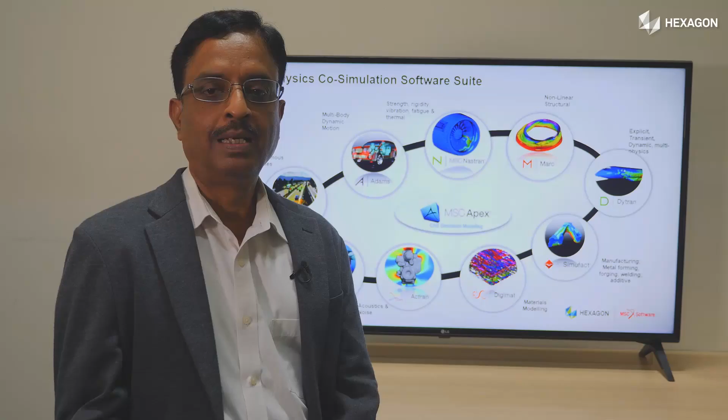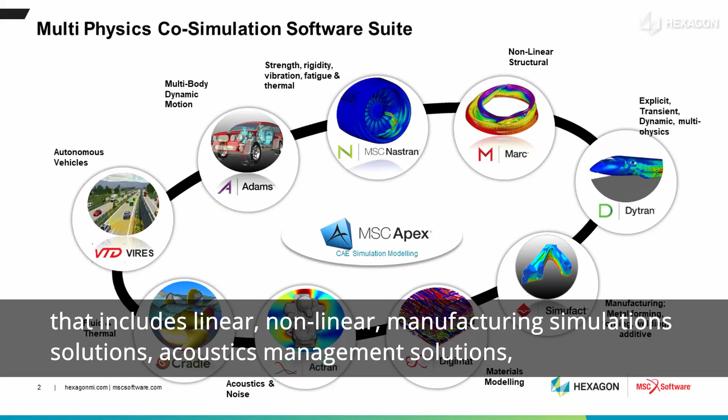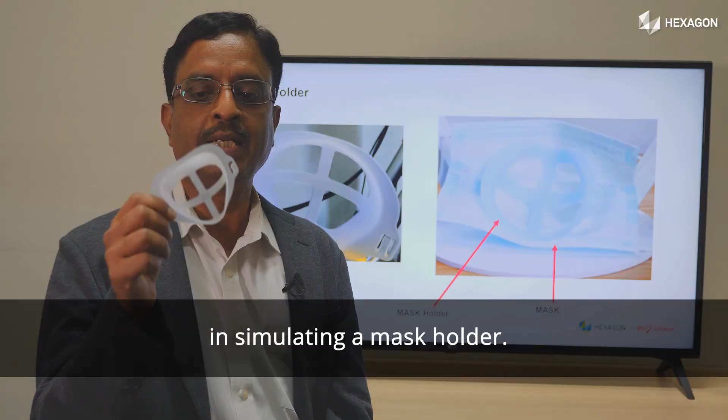Hexagon MSC Software has a wide range of multi-physics co-simulation software that includes linear, non-linear, manufacturing simulation solutions, acoustics management solutions, CFD simulation solutions, multi-body dynamic solutions, and many other solutions, and all of them work together to solve a single engineering simulation problem. I'm going to explain how Hexagon MSC Software is going to help in simulating the mask holder. We are going to do three different simulation applications for the mask holder.

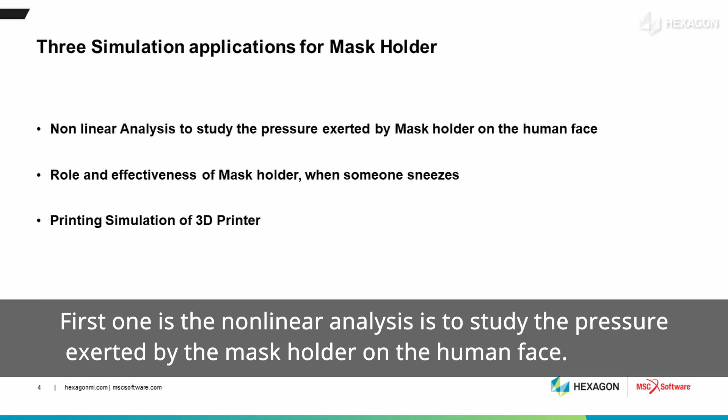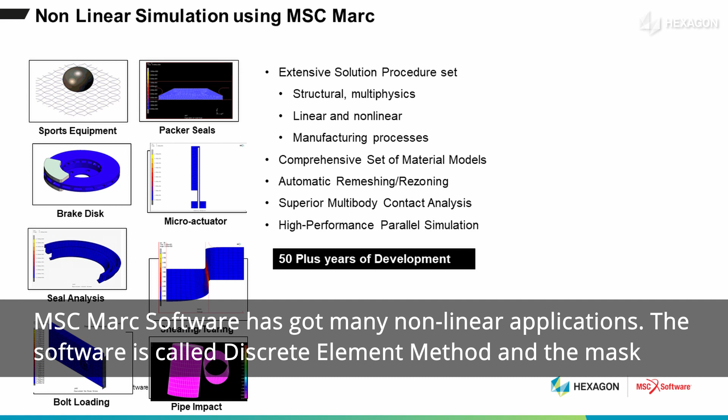The first one is a non-linear analysis to study the pressure exerted by the mask holder onto the human face. The MSC Marc software has many non-linear applications. This software is called the discrete element method, and the mask is modeled as a fabric structure.

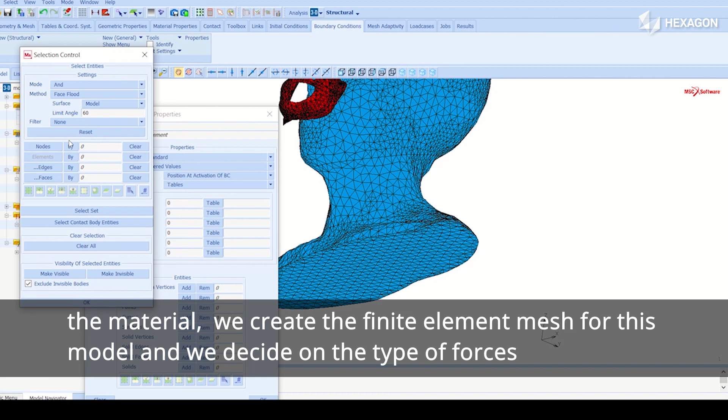We bring in the CAD model, we bring in a dummy, and we put this mask holder onto the human face. Then we define the material, and we create the finite element mesh for this model. We decide on the type of forces that go into the mask holder, and we provide the supporting conditions.

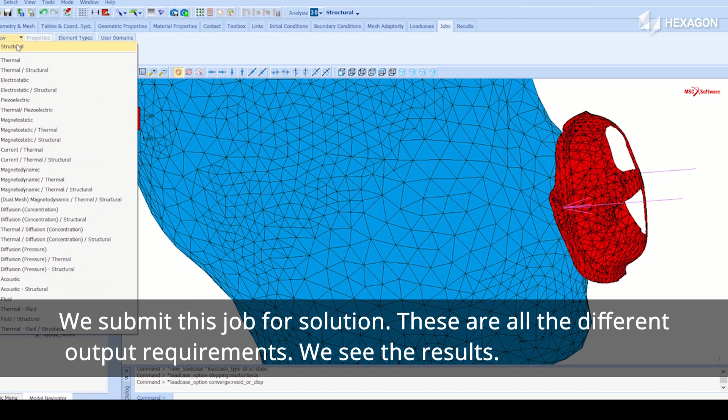Then we submit this job for a solution. These are all the different output requirements we select, and then we see the results. You can see the way the mask holder moves up when somebody is using it, and also the pressure distribution on the human face.

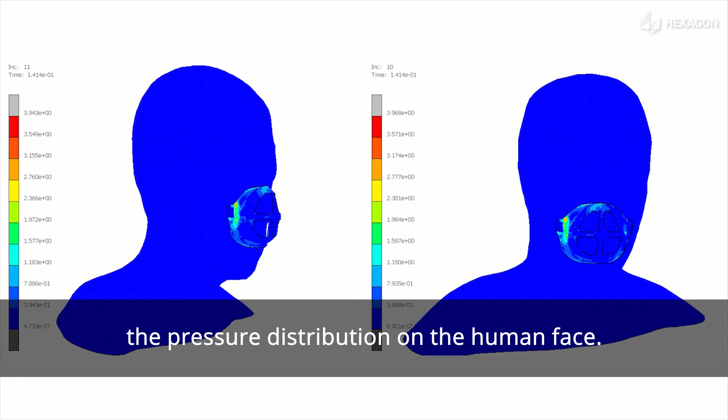The second one is that the mask holder is also going to change the characteristics of the way you breathe and also the way you sneeze along with the mask.

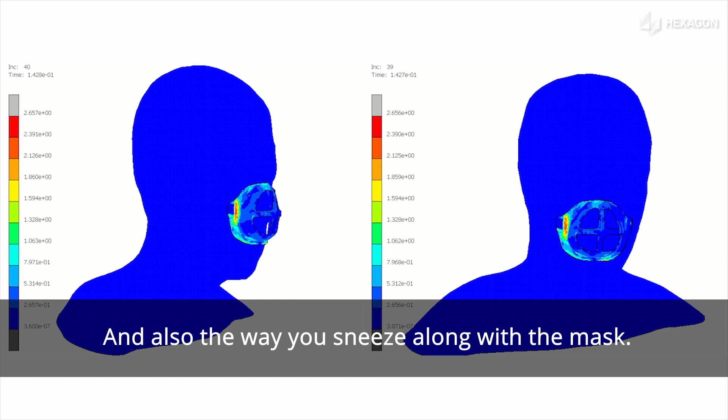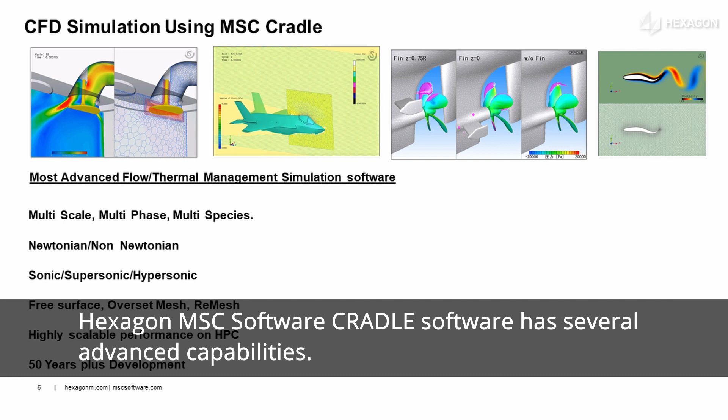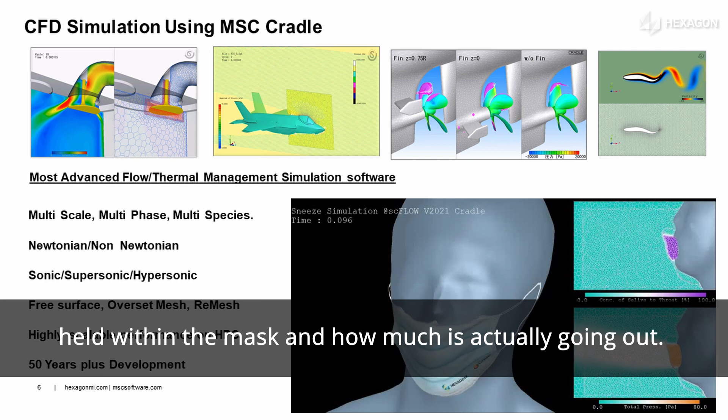Hexagon MSC Software has MSC Cradle, which has so many advanced capabilities. This is a model using CFD software. In this situation, when somebody is sneezing, we look at what kind of particles are being held within the mask and how much is actually going out.

One simulation is with a mask, but now what we are going to do is put the mask holder onto the mask, and somebody is going to sneeze, to see what really is going to happen. There are multiple things this CFD solution can do.

Now you see in this result there are two conditions. The left one shows without a mask holder and the right one shows with the mask holder, and also how the airflow pattern changes, and whether this will also create any issue for those people who hold the mask and are also able to breathe.

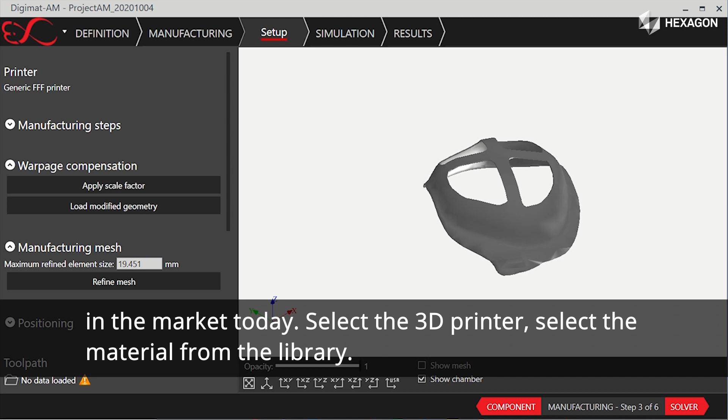Hexagon MSC Software has a solution called Digimat AM. This has a comprehensive library of all the 3D printers in the market today. You select the 3D printer, you define the material which comes from a library of materials. In this case, we define it as a nylon material. Then we simulate how this is going to be building up while the 3D printing happens.

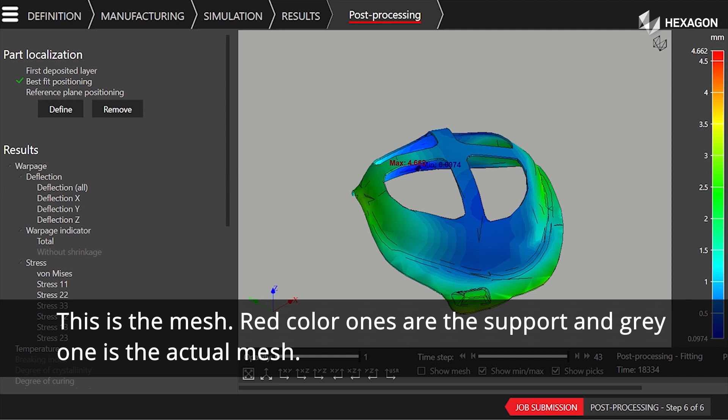After that, we study the mesh - the red color one was the support and the gray one is the actual mesh. Then we see the results as the 3D printing happens, how much distortion and deformation occurs.

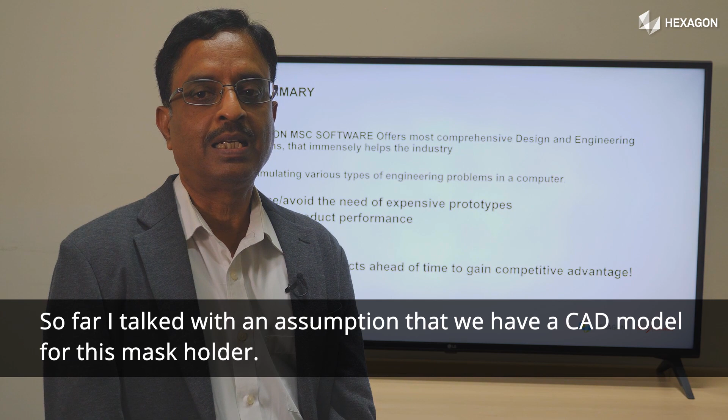So far I talked with an assumption that we have a CAD model for this mask holder. But in case there is no CAD model available, this can be reverse engineered.

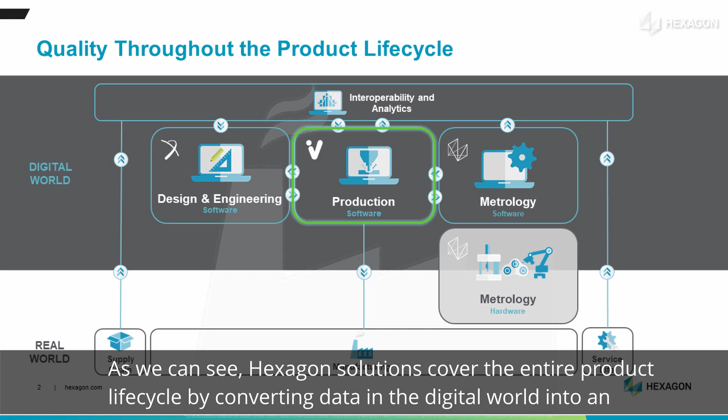Now we will go through the details related to the smart concept to reality functionality with Hexagon Solutions. As we can see, Hexagon Solutions cover the entire product life cycle by converting data in the digital world into an actionable, meaningful output to be implemented in the real world.

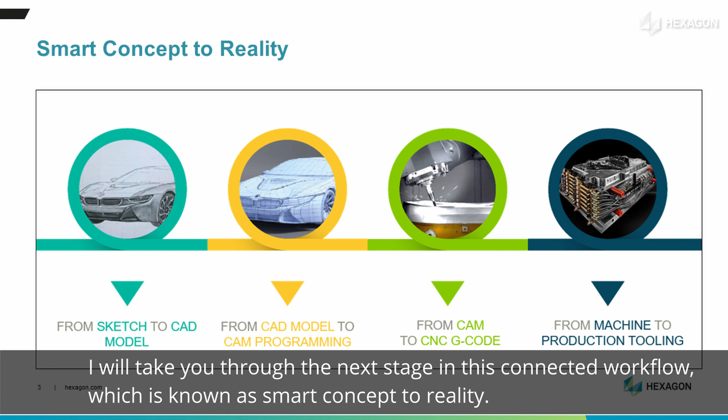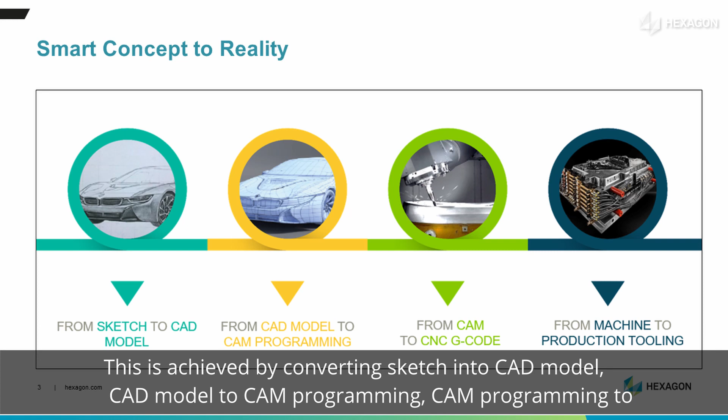I will take you through the next stage in this connected workflow, known as smart concept to reality. This is achieved by converting a sketch into a CAD model, to CAM programming, to CNC G-code validation and simulation, and from machine to production tooling.

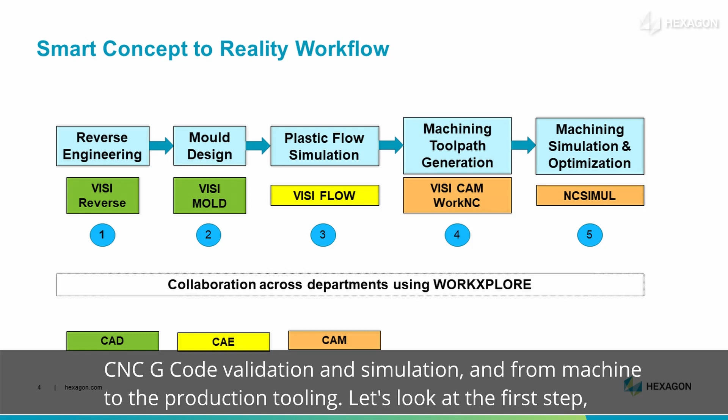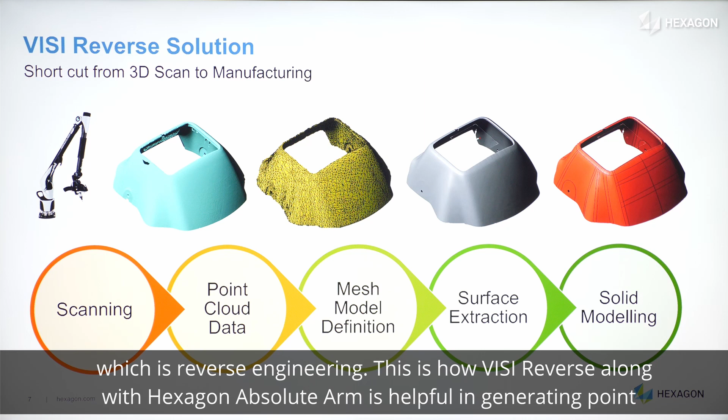Let's look at the first step, which is reverse engineering. This is how VISI Reverse, along with Hexagon Absolute Arm, is helpful in generating point cloud data by scanning the physical part and converting it into a mesh model, from which the surface is extracted using various methods, finally creating a 3D solid CAD geometry.

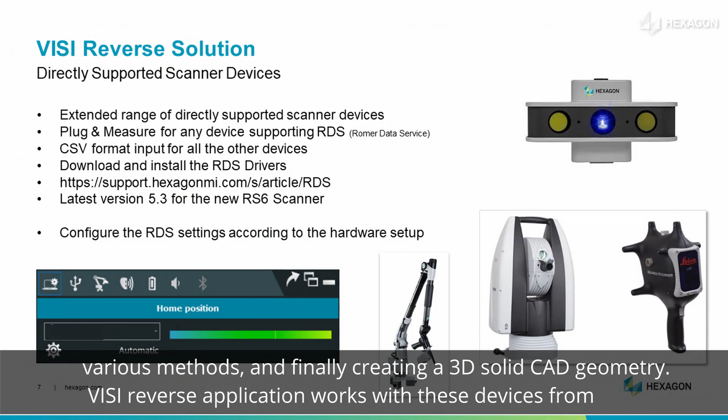VISI Reverse application works with these devices from Hexagon, namely the Portable Absolute Arm, the Leica Absolute Tracker, as well as the AICON Scanner.

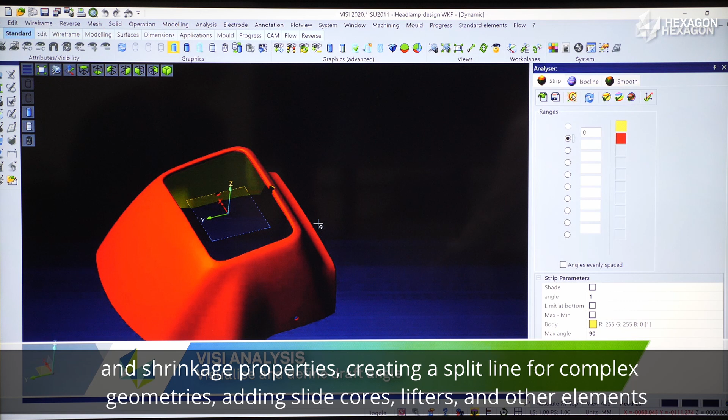The next step is to generate the mold design and simulate the plastic flow. This is achieved very quickly and easily in Visi. The process involves draft angle visualization, face drafting, assigning specific material and shrinkage properties, creating the split line for complex geometries, adding slide cores, lifters, and other elements from a standard catalog, defining the runner gates and cooling channels, and finally checking for manufacturing defects like weld lines, warpage, and air traps before the injection molding process with the help of VisiFlow.

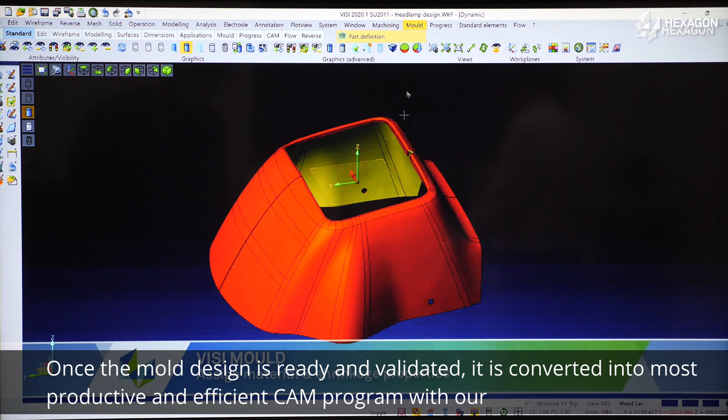Once the mold design is ready and validated, it is converted into the most productive and efficient CAM program with our flagship solution VisiCAM. VisiCAM is an extremely popular CAM solution in plastic mold manufacturing companies, with its latest features ensuring hassle-free programming and productivity through unparalleled machining strategies for various industry segments.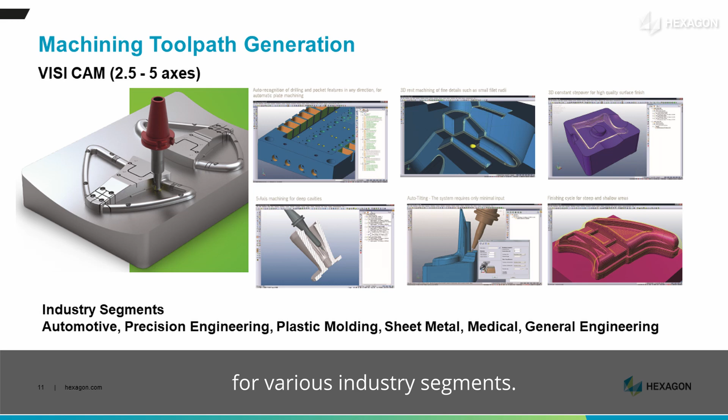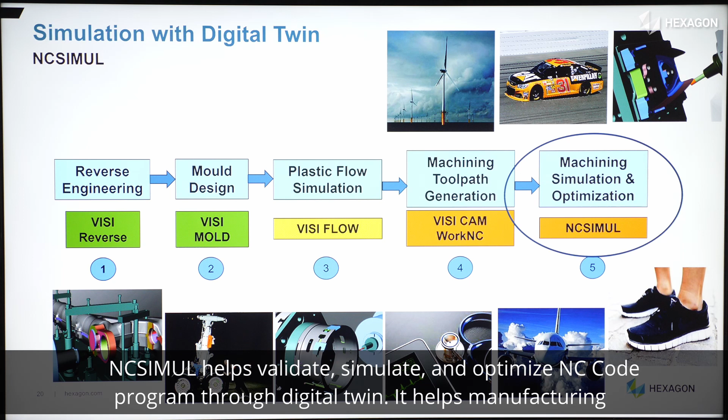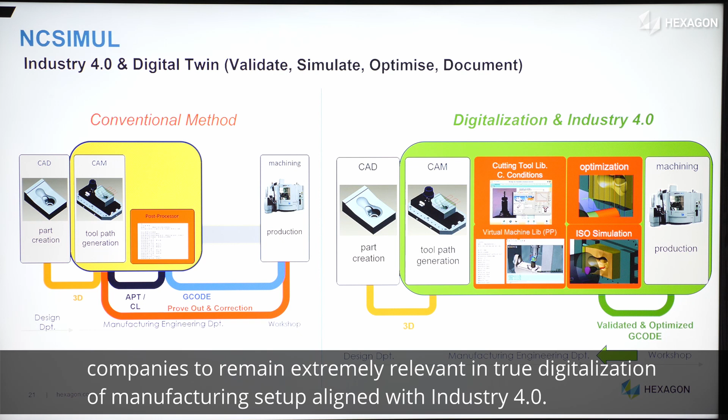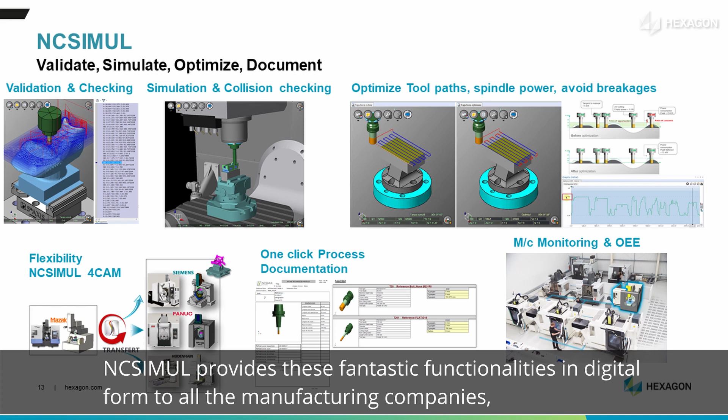A stitch in time saves nine — that's exactly what NCSIMUL provides to manufacturing companies. NCSIMUL helps validate, simulate, and optimize the NC code program through a digital twin. It helps manufacturing companies remain extremely relevant in true digitalization of the manufacturing setup, aligned with Industry 4.0. NCSIMUL provides these fantastic functionalities in digital form to all manufacturing companies, thereby avoiding every possible risk in the real world of machining.

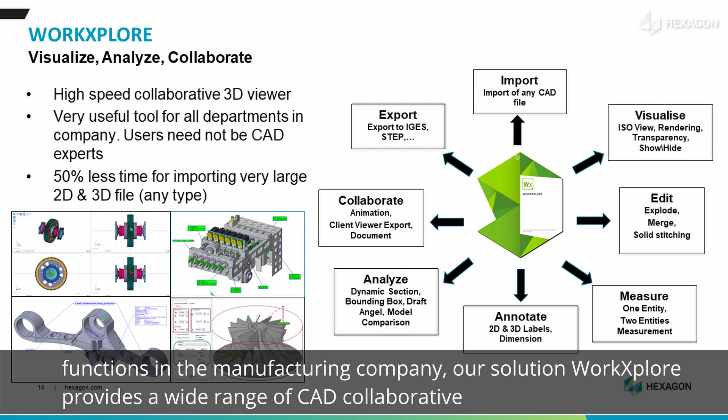In order to ensure collaboration amongst various functions in the manufacturing company, our solution WorkXplore provides a wide range of CAD collaborative functionalities, as can be seen in this slide.

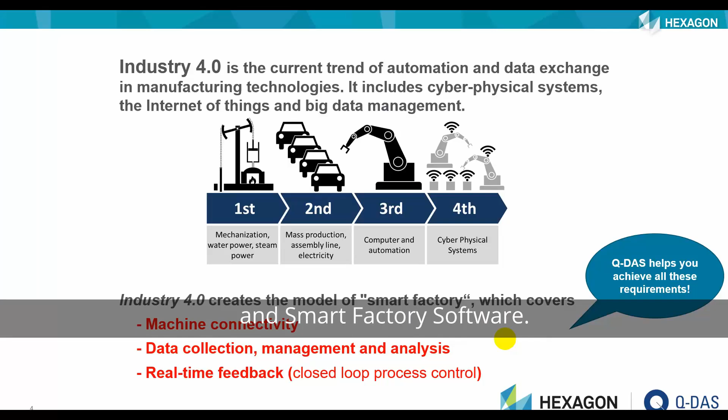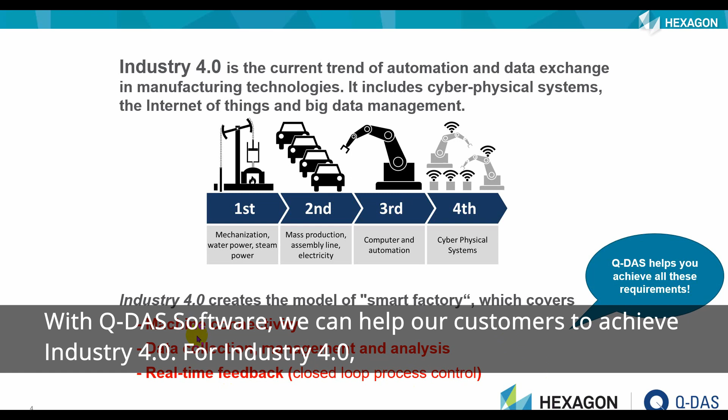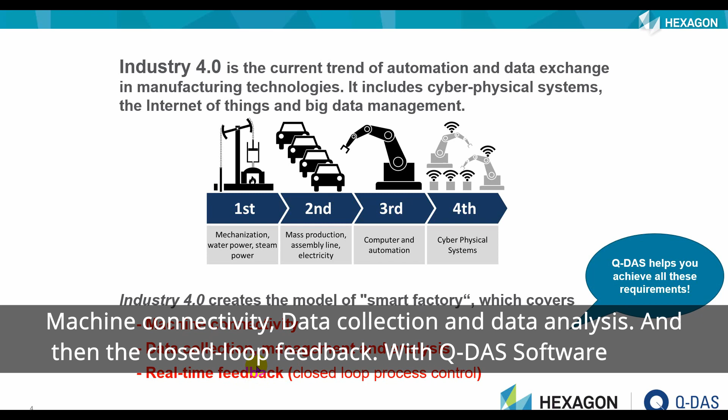I would like to introduce to you Hexagon's Q-DAS software and Smart Factory software. Q-DAS software is intended to provide factory digitalization solutions, and with Q-DAS software we can help our customers achieve Industry 4.0. For Industry 4.0, we have three basic requirements: machine connectivity, data collection and data analysis, and then we provide the closed loop feedback. With Q-DAS software, we have 8,000 customers worldwide.

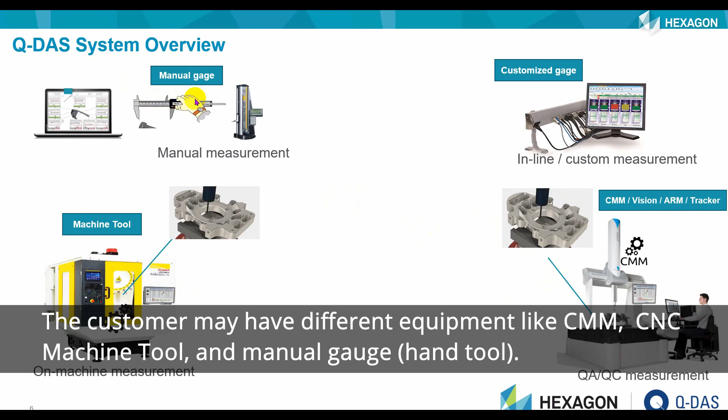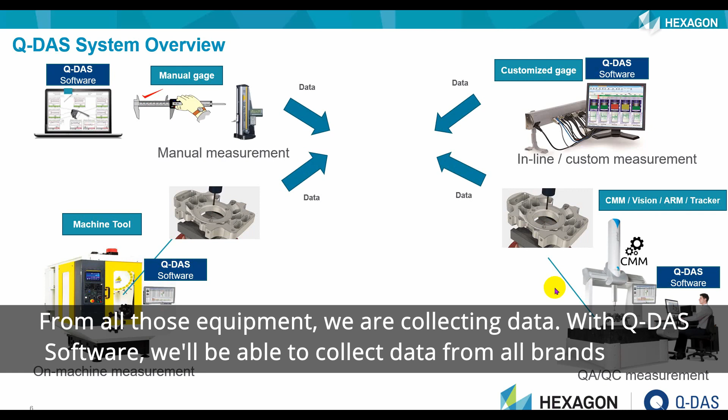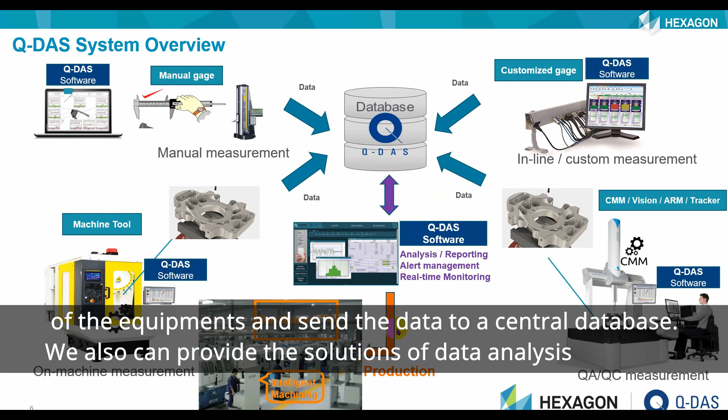So this is a very quick system overview of how the Q-DAS system works. We have different equipment like CMM, CNC machine tools, and manual gauges or hand tools. From all those equipment we are collecting data, and the Q-DAS software is able to collect data from all brands of equipment and send the data to the central database. We can provide solutions to do data analysis, reporting, and then we do the closed loop feedback. Closed loop basically means we show the dashboard to production, with all the quality results in real time.

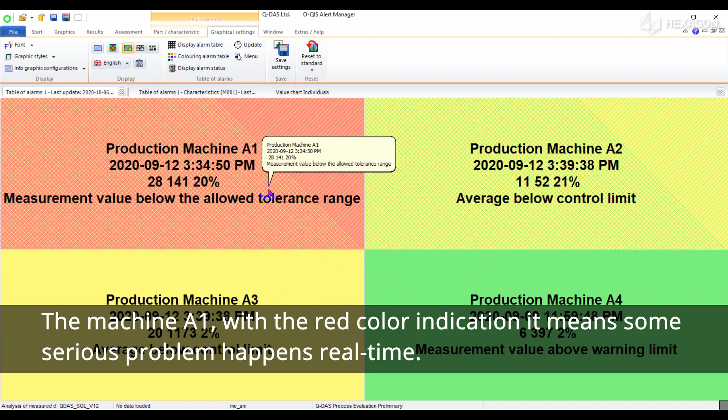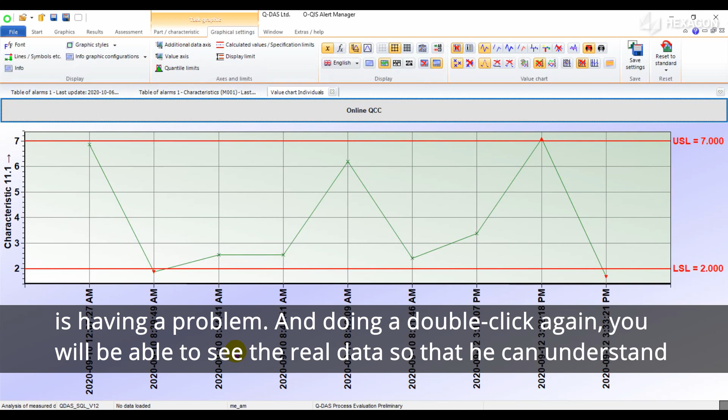So on the screen you can see this customer has 4 CNC machines. Machine A1, with the red color indication, means some serious problem happened in real time. So the shop floor guy can just double click the dashboard, then he can see which part and which characteristic is having a problem. Double clicking again, he will be able to see the real data, so he can understand. This data shows the last data point is below the lower specification limit, which is why machine A1 is receiving an alarm.

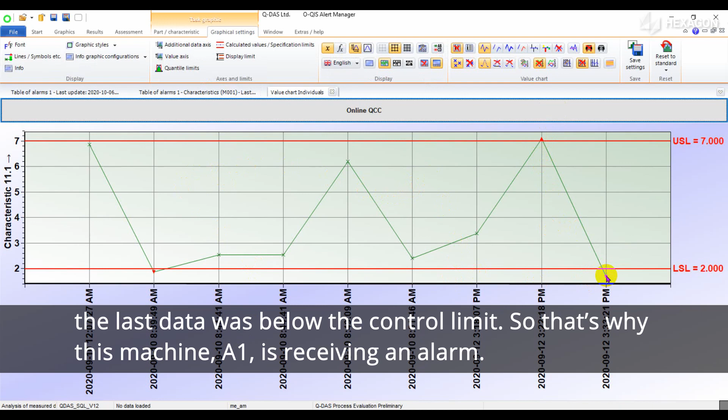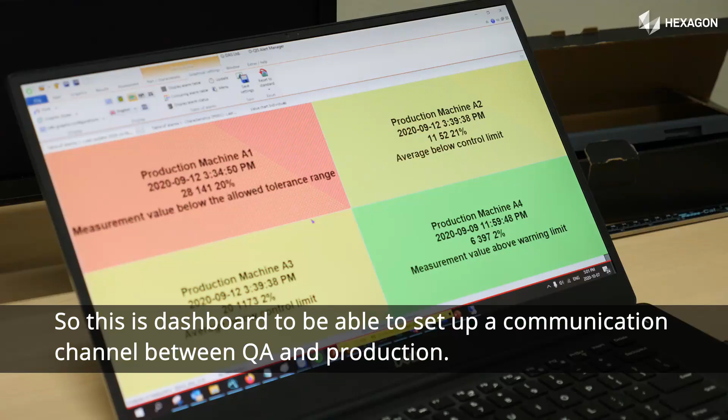So this is a very quick and real-time dashboard to be able to set up the communication channel between QA and production. I'm going to show you another software which is called Smart Factory Asset Management.

This is a cloud-based software. You can find all your machines in your factory. You may have multiple factories in different locations. So this one is a factory in Spain, and this is in Detroit.

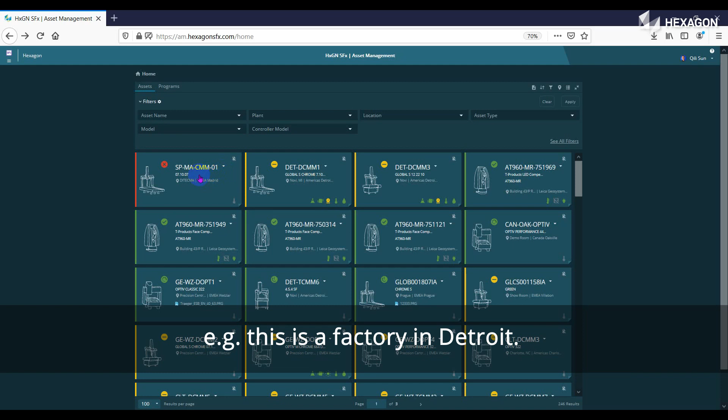So if I double click this particular machine, you can see the machine status real time. For example, I can monitor the sensors and the environmental parameters like temperature real time. I can also monitor the utilization of this particular machine in my Detroit factory.

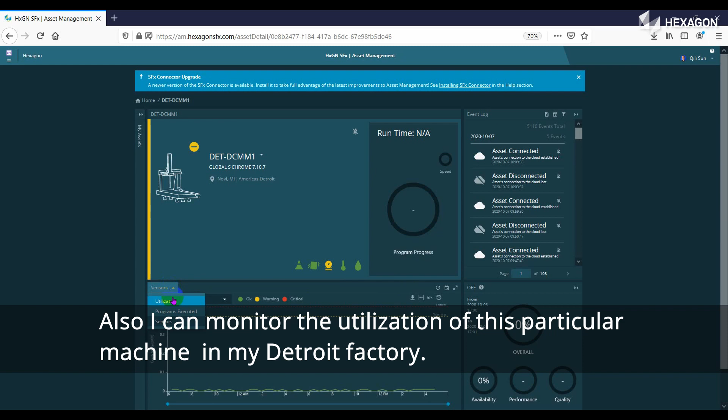We also provide all the events, meaning you can see all your programs, which is running, which is canceled, which is stopped, and we also provide the OEE calculations. So this is an entire solution for you to monitor real-time all your machines.

On this station, we will showcase to you the AI solution that we have for defects. So right now, we will just go ahead with the capturing of the data with our system.

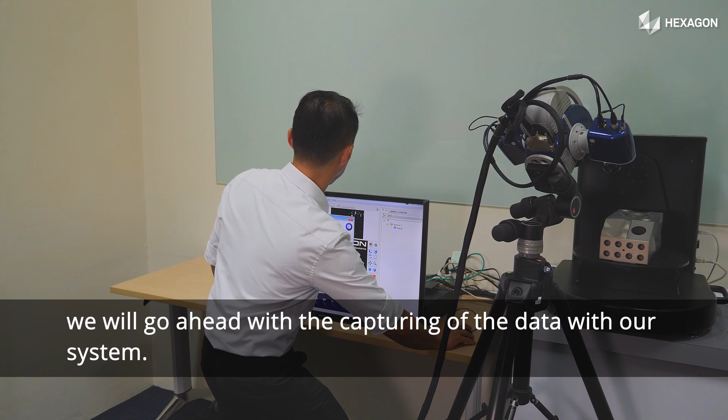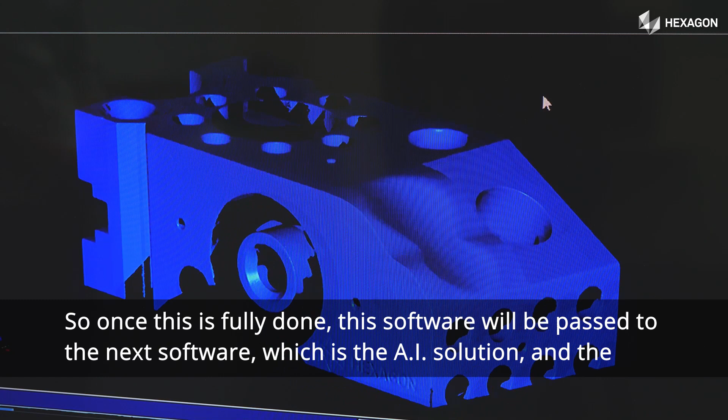So besides capturing the data itself, as you can see right now with the capturing, we are able to capture some defects, but we are not able to detect it. So once this is fully done, this data will be passed to the next software, which is the AI solution, and the defect will be ultimately picked up by the AI solution that's being provided.

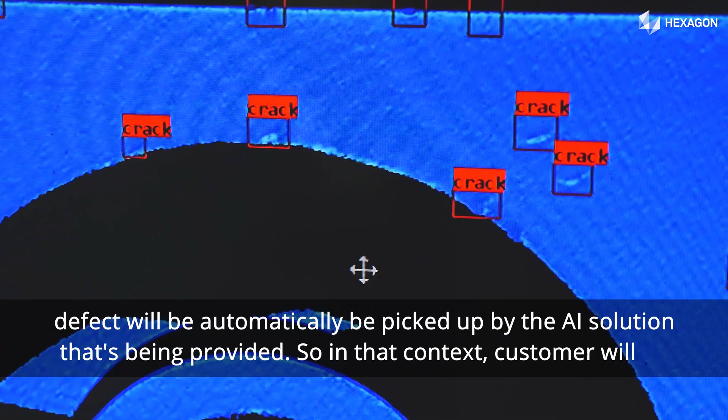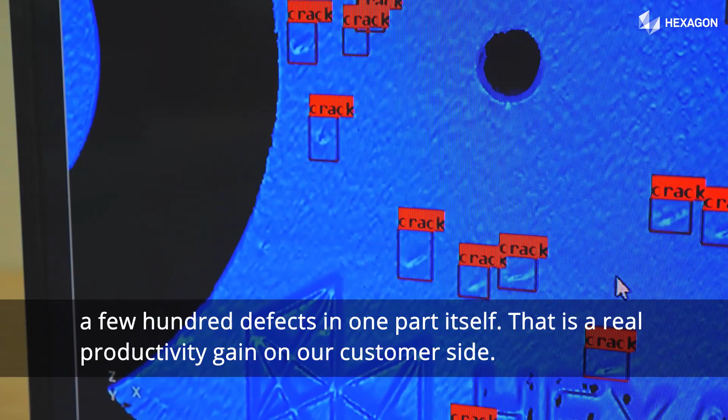So in that context, the customer will have the mindset that it will ease off on the detection side. We're not talking about defects that's only one or two. We're talking about multiple defects, probably a few hundred defects in one part itself. That is actually a real productive gain on the customer side.

What we bring to the table is insights into the product from the inside. The inside data of the product is provided by a CT scanner, and we take that data to give you more insights of the product. Volume Graphics is the market-leading software for the analysis and visualization of industrial CT data.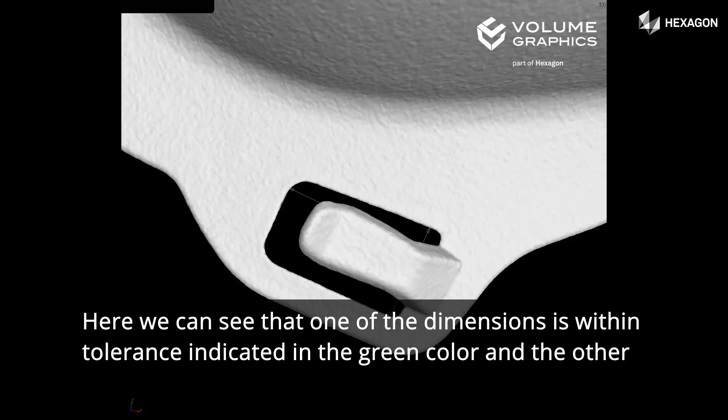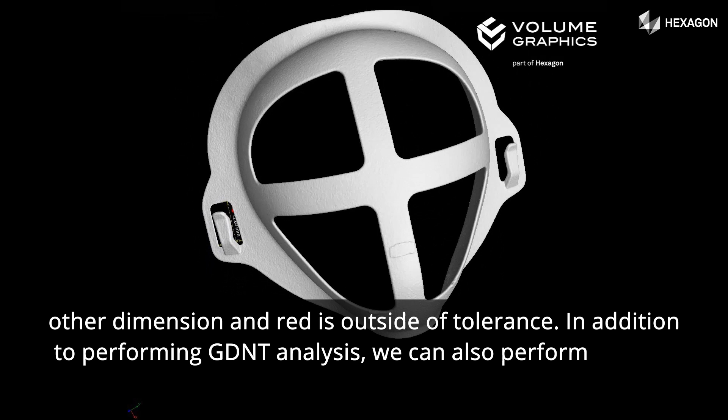The part looks good from the outside, but let's see what the CT data shows us. The first analysis we're going to perform is a dimension measurement of the notch. Here we can see that one dimension is within tolerance, indicated in green, and the other dimension in red is outside of tolerance.

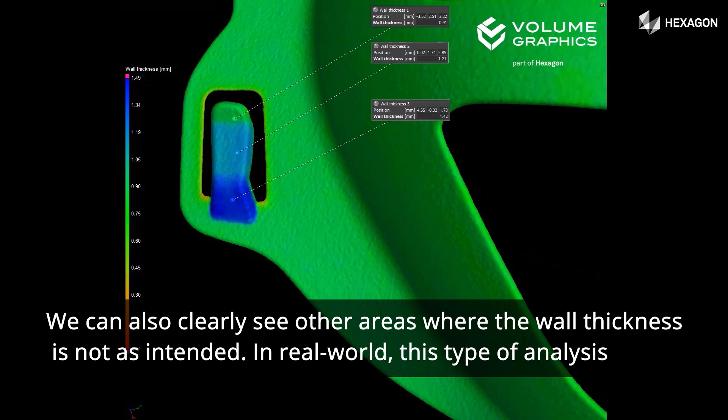In addition to performing GD&T analysis, we can also perform what is called a wall thickness analysis. This is performed to see if the part has maintained the desired wall thickness after manufacturing. Most of the part is green, indicating tolerance. The area near the notch is thick, but this is a desired effect. We can also clearly see other areas where the wall thickness is not as intended. In the real world, this type of analysis is critical to producing watertight, leak-proof parts.

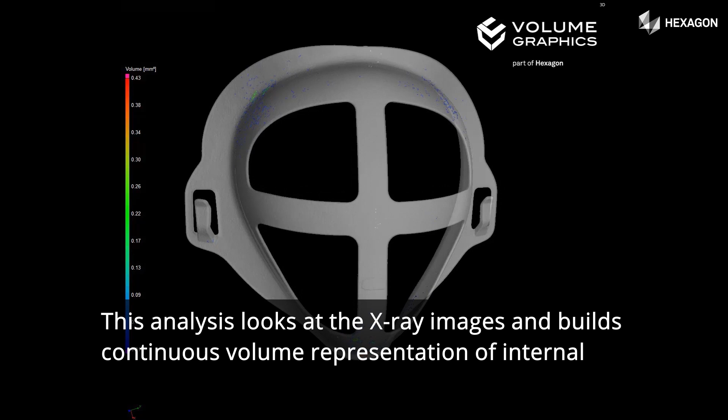Next, let's take a look at the internal defects of this part. This analysis looks at the X-ray images and builds a continuous volume representation of internal pores, cracks, etc. The analysis then quantifies these defects, and these can be communicated to colleagues in manufacturing so they can adjust the flow pressure, injection location, etc.

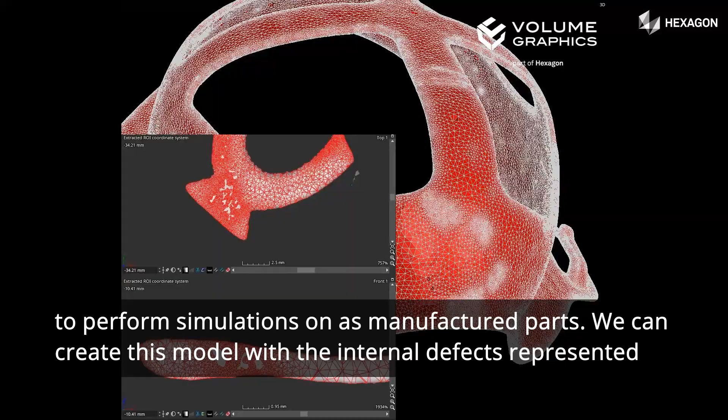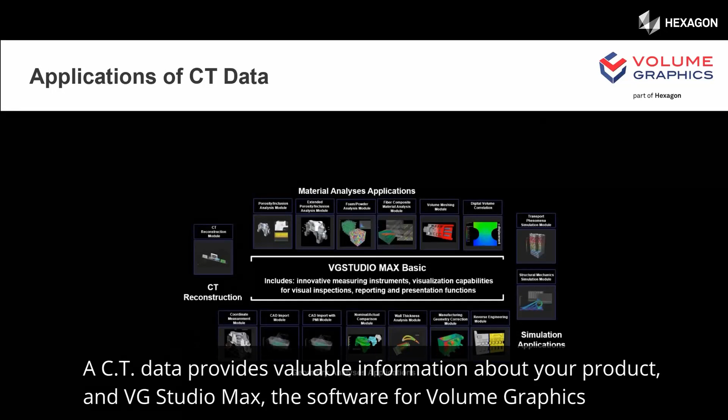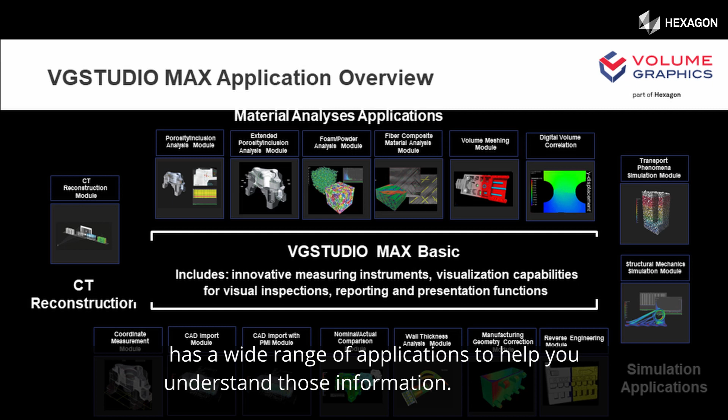and produce reliable products. Another application for the CT data is providing a tetrahedral mesh for the simulation team members to perform simulations on as-manufactured parts. We can create this model with the internal defects represented as such, or as a porosity percentage. CT data provides valuable information about your product, and VGSTUDIO MAX, the software from Volume Graphics, has a wide range of applications to help you understand that information.